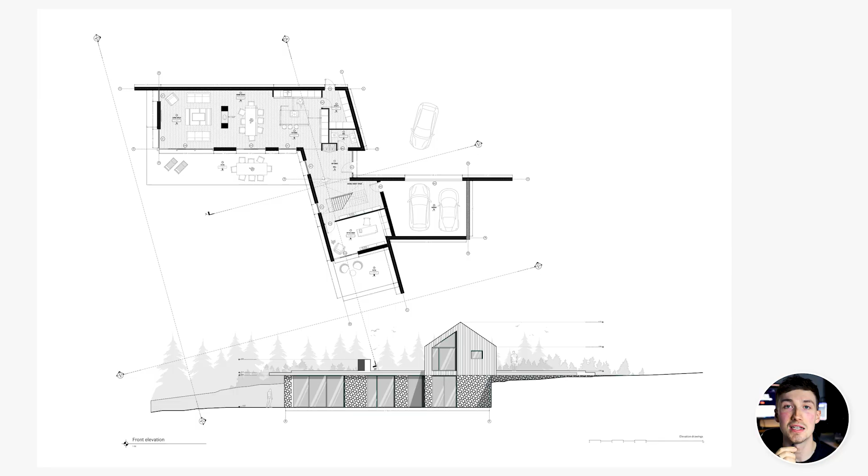By changing color, texture and hatch styles, line weights and layers, you can really start bringing your drawings to life, turning a black and white drawing into something powerful and captivating. Stylizing your drawings makes them more memorable and consistent when putting them together in a document. This is where Rayon becomes really powerful with its graphic capabilities, letting you edit and stylize drawings to communicate them the way you want. In this lesson, I'll demonstrate how you can turn this black and white drawing into 3 different styled drawings.

For the purposes of this lesson, I've put together a composite drawing of the ground floor plan and front elevation. The reason I've done this is because it makes it easier to talk through how to style your drawing and coordinate between the two views, showing you how to implement the styles in both elevation and floor plan. A composite drawing is really powerful in my opinion—it's a great way of showing different levels of information that relate to one another on one page, so we've combined them in this instance.

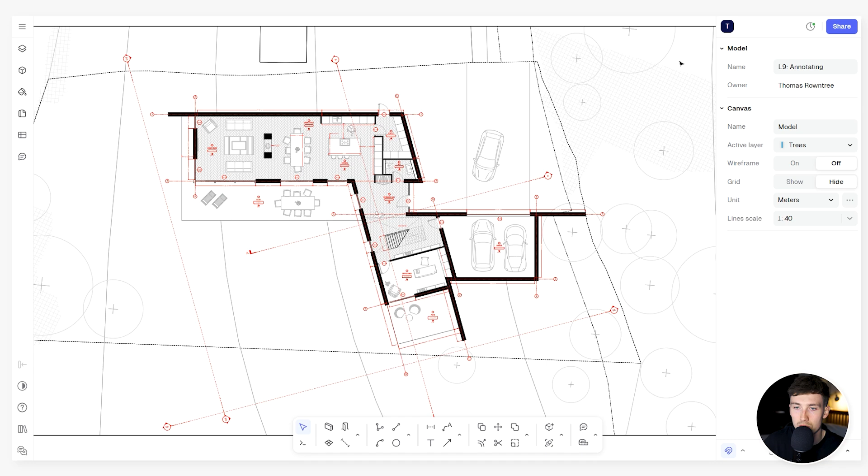The way I've combined this is fairly straightforward. All you have to do is head over to your model, highlight the components you want to copy across, right click, click copy as export—this is really important when copying across models. Come back over to your model, right click, and then paste. That's how you copy items across.

Defining and building a graphic style that's represented throughout your drawings is really important. Graphic styles help encapsulate the viewer, visually enhance your drawings, and provide consistency throughout. So for example, we have a floor plan, a section, an elevation, site plans—if there's consistency in the graphic style throughout, you can clearly see there's a narrative, a coordination between them, and you can associate these drawings together, which is really important when trying to sell your ideas.

I like high contrasting drawings with lots of detail, lots of layering, lots of annotations, and as you can see, the implementation of a graphic style really helps define and communicate a narrative of the project and the story behind the drawings. The 3 graphic styles I'll show in this lesson will demonstrate how you can tell drastically different stories just through the use of color and line weights.

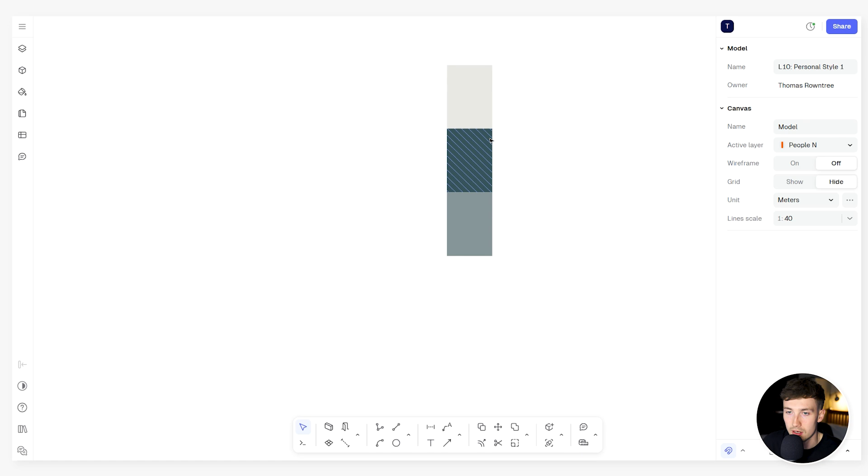We're going to demonstrate that by showing you all of the Rayon styling tools to bring your drawings to life. The first style I'm going to create from this black and white base is going to be a blue style. Over on this right hand side here, I've already defined a kind of color palette.

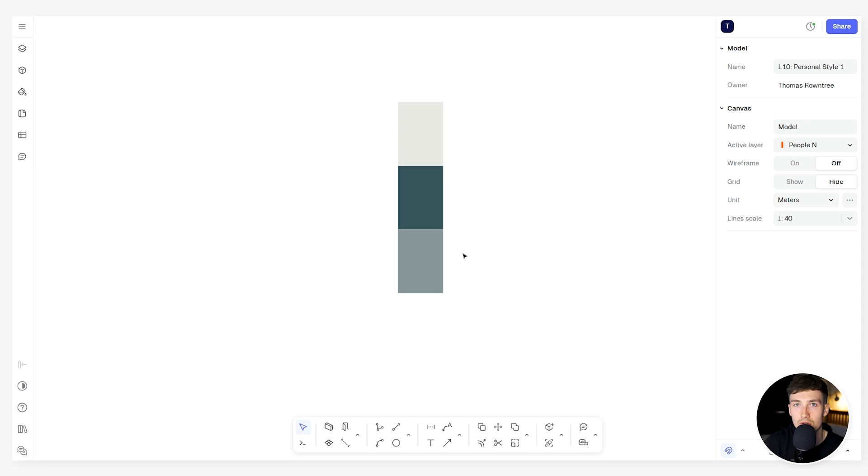Defining a color palette is really important when creating any set of drawings because it helps define a level of consistency throughout—there's a level of coordination. By showing these 3 shades of blue, there's a style and a kind of layering and hierarchy to the drawing that can be implemented. So these are the 3 colors I'm going to work with for this blue style, and there's going to be a hierarchy and layering that we're going to play with.

Although I've touched on many of these components already in this course, I'm going to quickly do a reminder. There are 4 different types of styles: a text style, an annotation style, a shape style, and a wall style.

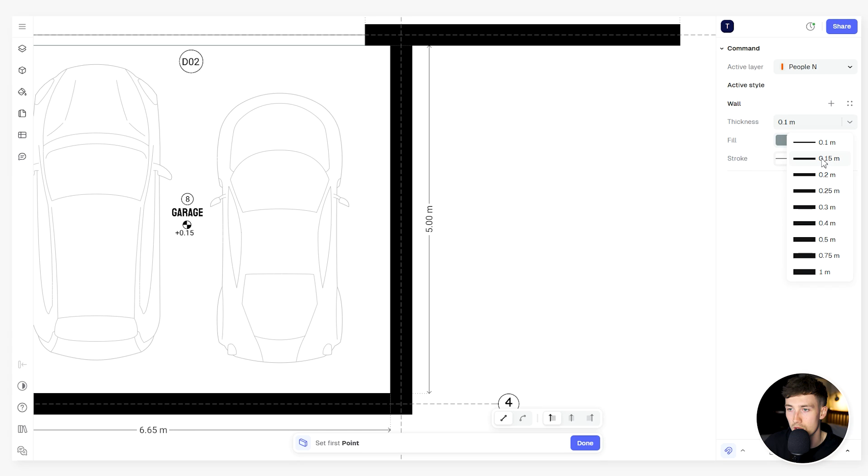So for example, if we start with a wall style, when you select your wall or start drawing a wall, you'll instantly have a kind of default style activated on that wall. You can change the wall thickness, the wall fill, and you have the option of choosing a solid fill, which could be black for example, and you can change the opacity. You can also use the color picker, which is really handy.

For example, once you've defined a color scheme, you can select the color, and then you can have the option of saving that style. So we could call that 'blue wall'.

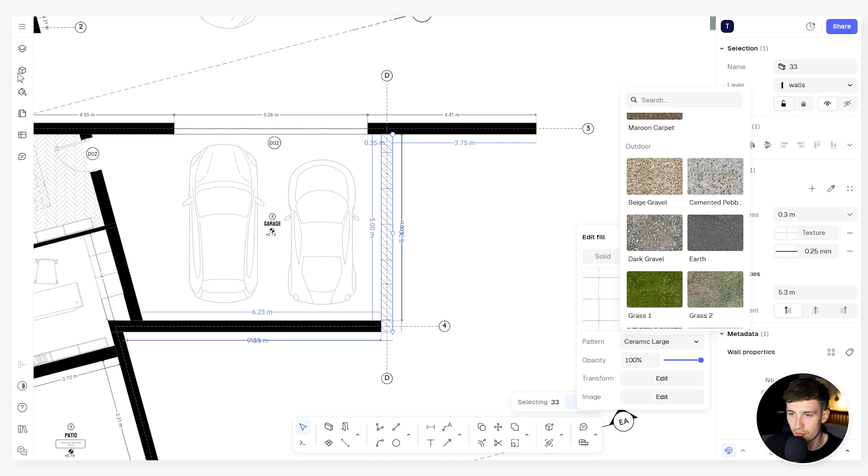You have the option of choosing a texture using the default library, or heading over to the left and using Rayon's texture library, which you can choose from many different textures, which you can transform by scaling up and down. You can change the rotation, and then finally you can use a hatch, which you can also select. You can change the opacity, change the stroke, once again scale it up and down, rotate it, offset it.

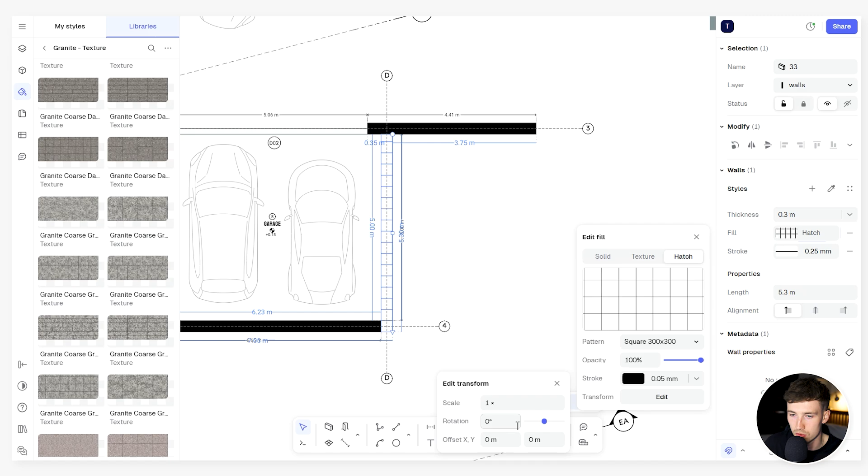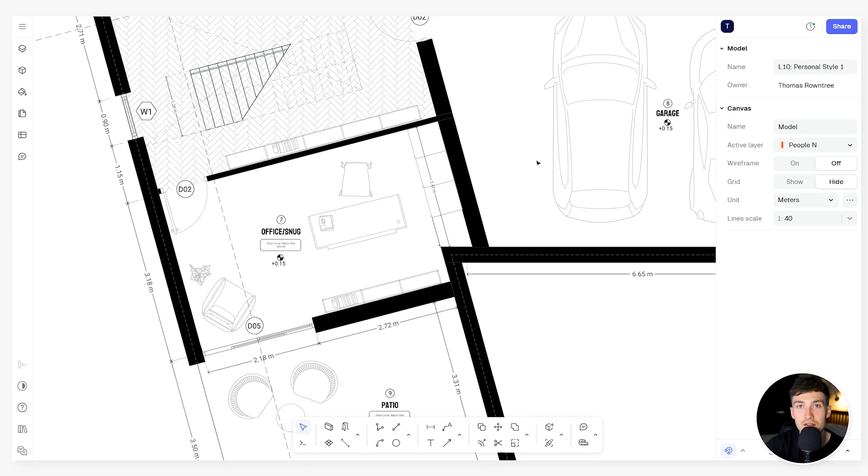Additionally, with annotations, once again you can change the color, text, arrowhead, etc., as demonstrated in the previous lesson. Likewise with text, you can change the font size, and finally with shapes, you can once again change the fill or hatch. In addition to saving a style to an element, you can also detach a style from an element.

So for example, when we select this wall here, you can come to the right hand side and click detach, where you can then make this wall its own style. And a really useful tool to point out also is if you select an element and you click pick style, you can also select the item and it will match its style.

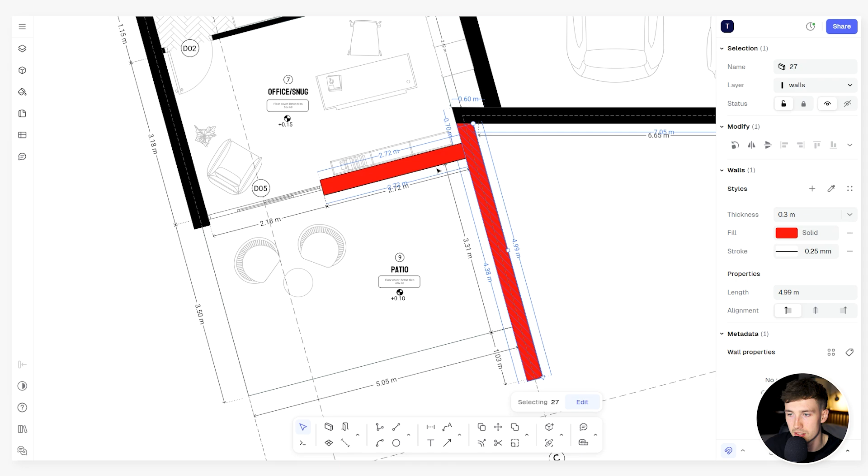And if you head over to the left hand side and select the styles tab, you can see that I have all of these shape styles, wall styles, text styles, and annotation styles saved on the left hand side. These saved styles become really useful when you want to change multiple items that have that style assigned to them.

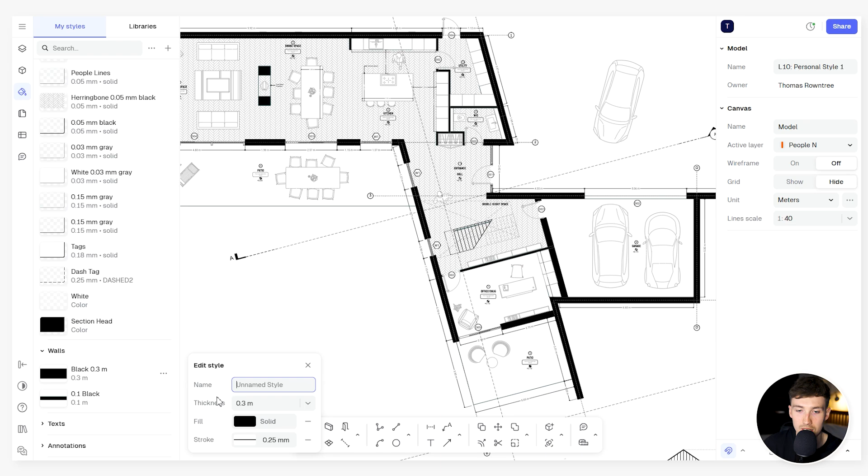For example, if we change this wall style, we can click the three dots, select edit. We could change that wall now to red, and all of those walls that have that style assigned to it will also change. Now I hope that gives you a good summary of styles in Rayon.

And now we're going to start implementing this blue style. So the first thing I'm going to do is head over to the left hand side. I'm going to create a new layer, and I'm just going to give it a background, and I'm going to ensure that that is dropped to the back of the drawing.

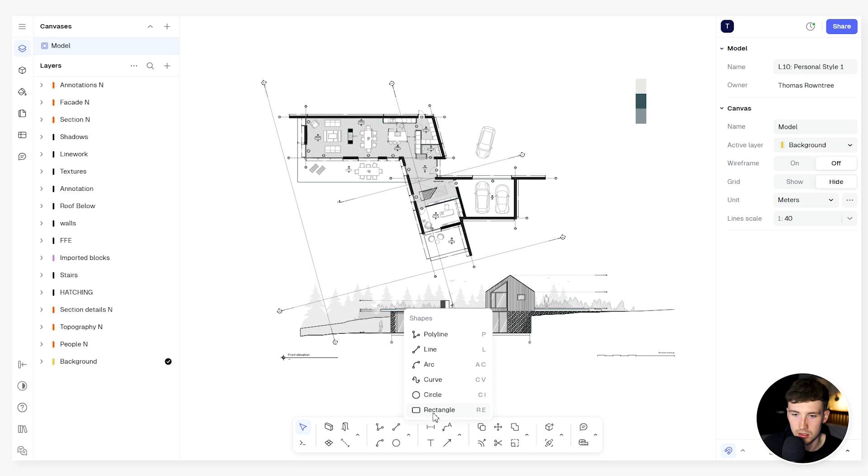And I'm going to draw a background using this light color here, and we're simply going to draw a rectangle, which is going to be our backdrop for the drawing. This gives us a nice backdrop, which we can then right click and lock into place. So that layer is now locked.

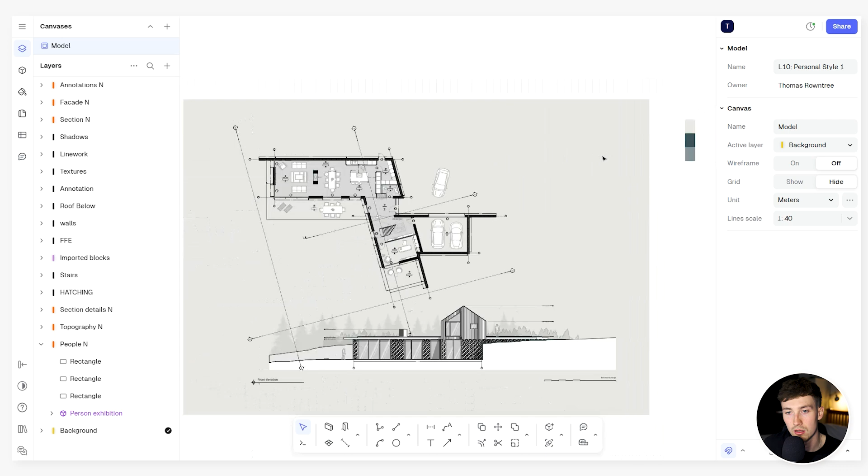So we can now start working into these walls and assigning these colors. Now the walls are going to be this heavy blue color. To give that hierarchy, we want the walls to have that structure and to indicate that weight and thickness in the drawings.

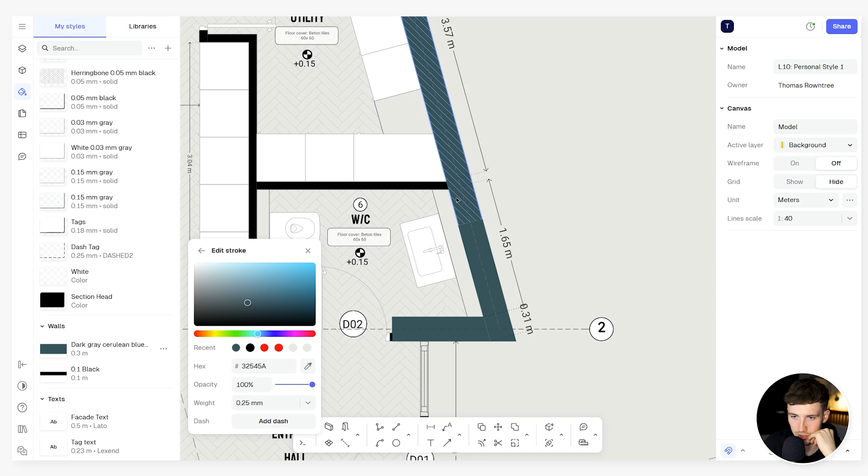So I'm going to come over to the left hand side, select the wall, and change that to this dark blue color. We're also going to change the stroke to the same color too, so we've got a nice consistent wall wrapping round. And for this item here, if we want to assign that style to it, you'd come over, click the quadrant button, and select the dark blue item.

And we're going to do the same with the internal walls. We're also going to make those the same color.

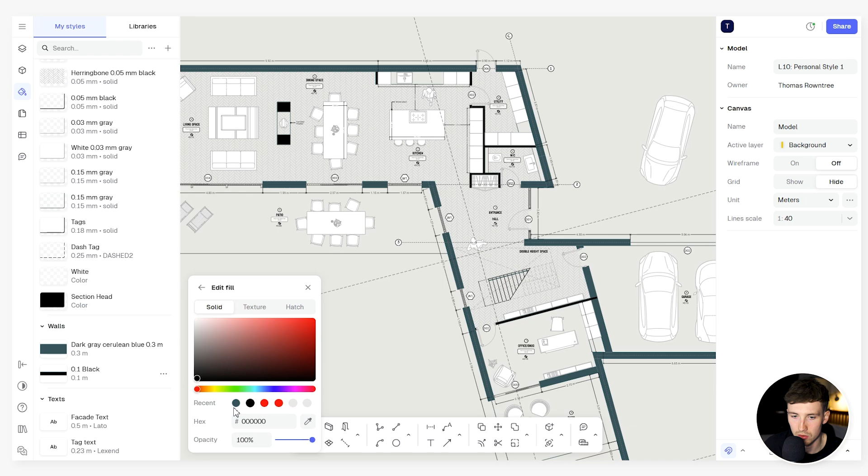Now currently the furniture is quite prominent in the drawings with their white background. So I'm going to select the block and change the style by just removing the fill, which makes them a little bit more subtle in the drawing and not so prominent.

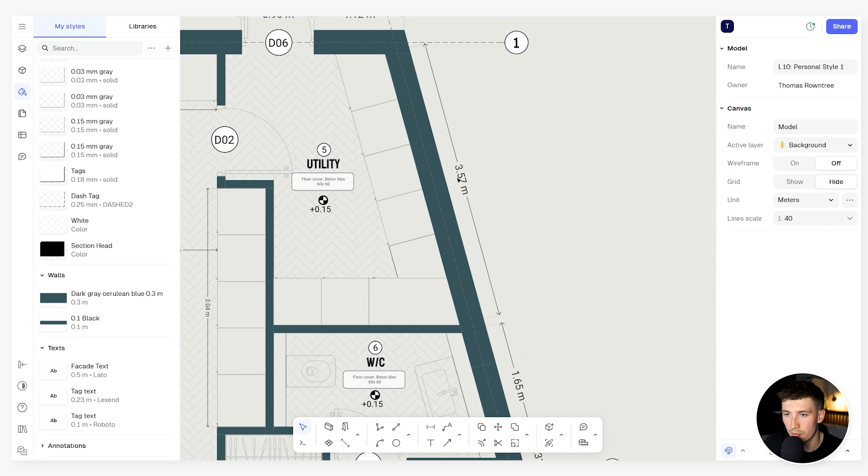A really good little hack for you guys is being able to select multiple items that don't have a style currently assigned to them. You can right click on an item and select similar, so you can either do same style, layer, type, or block. We're going to do same type, so we select all the annotations. Then you can come over to the right hand side, change that style now to that same blue, and all of those items of that type will then change.

And then we're also going to save that style to dimensions, so on the left hand side here in the annotations style toolbar, it will appear. We're also going to edit that style just to make it a bit more subtle, so we're going to drop the opacity down to 50%.

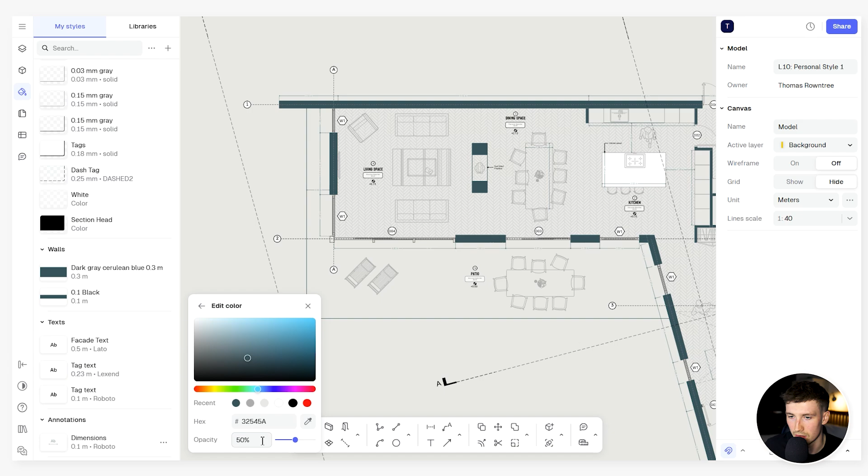Now this is going to be a process of changing all of the styles to the same blue, and I'm just going to do this as we go along to change all of the styles. And then the same with all of the text annotations, selecting all of the text, changing all of those to blue, and then shifting the attention slightly to the elevation. You can do the same with the hatches.

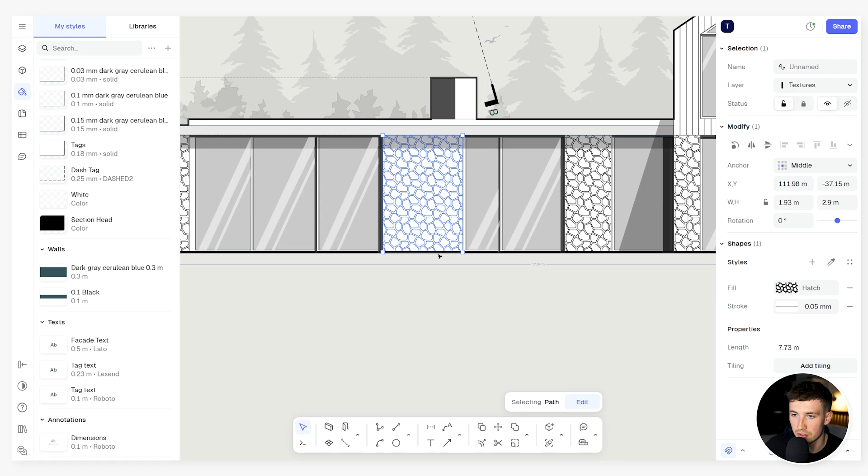These are currently a little bit too heavy, so we're going to change those hatches to the same blue, and drop the opacity down to 50% just to make them a bit softer. We can also save that style, so we're going to save that as stone hatch. Then we can select multiple items and change that by clicking the quadrant button.

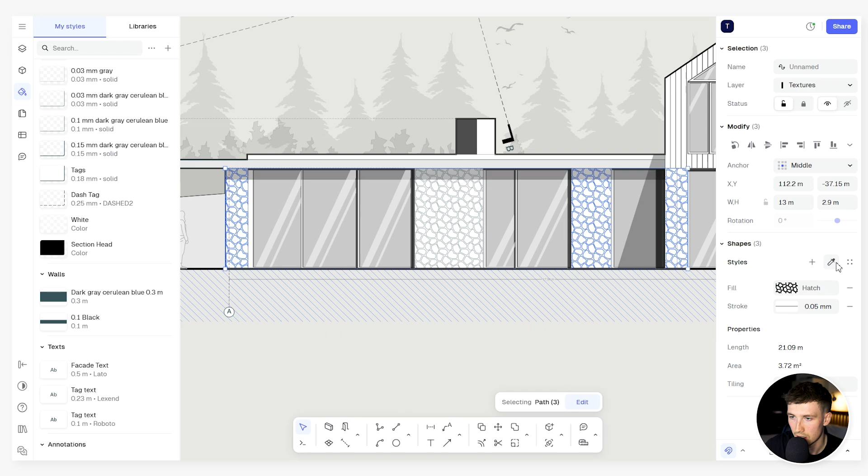And the same in the background here, we've added some trees which we've imported. We're going to change those to blue, so everything is going to be the same blue color. As you can see here, this is where the layering and the opacity works really well, where you have two items overlapping one another. You get that nice layered look in the drawing, and it gives the drawing a bit of depth.

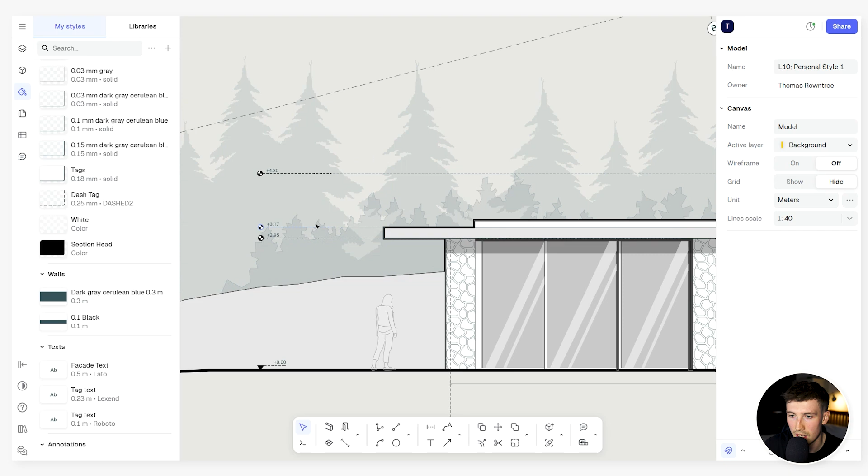A really useful tool to make note of is that you can also change the tiling of your hatch. If you head down to the right hand corner here, you can change the rotation, you can change the offset, but you can also click into the hatch and change it so that it is independent to any style. So even if you have a style assigned to it, you can rotate it, you can move it, and it won't change throughout.

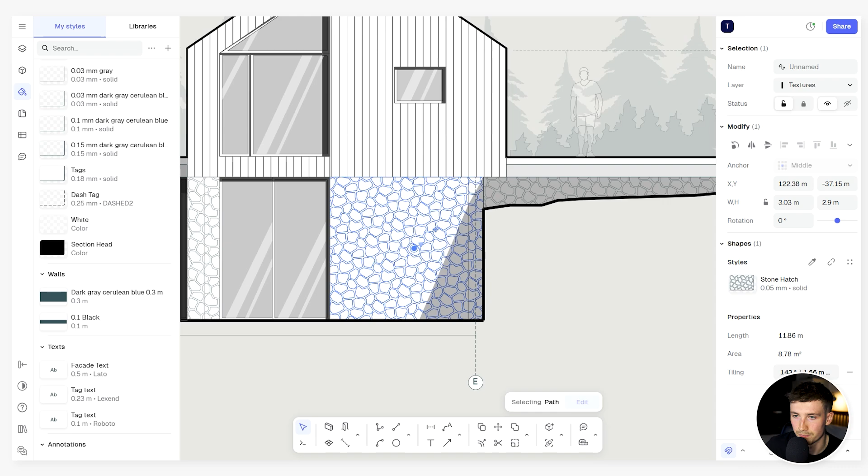Now, with a bit of work, you'll arrive at something like this, where pretty much everything has been assigned. With the blue, we now have a bit of a hierarchy, with some of the items dropping further into the background with the opacity. We now have quite a soft drawing using these pastel blues. It's a little bit softer than the harsh black and white with the red tone, but I think it's a really nice subtle touch. The colours work really well, and it has that nice and soft feel to the drawing.

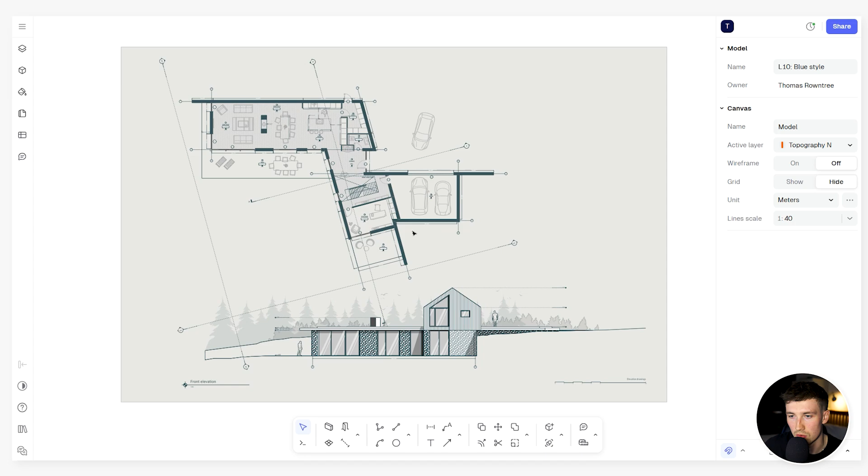So this is style number 1. Now the next style is going to be this rendered slash textured style. This is a really useful way of showing a realistic representation of your drawings, adding actual textures to indicate floor finishes, to indicate a realistic environment, in a carpet for example, the tiling throughout the kitchen, living and dining space. We've got some concrete floor for the garage, the patio area.

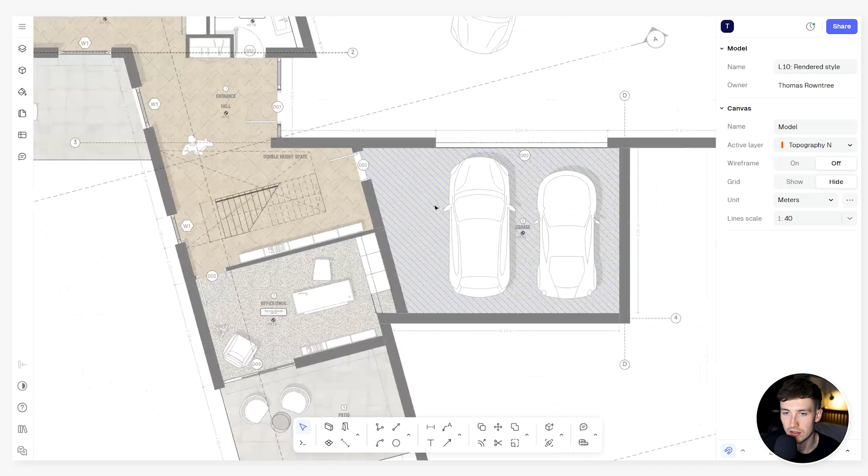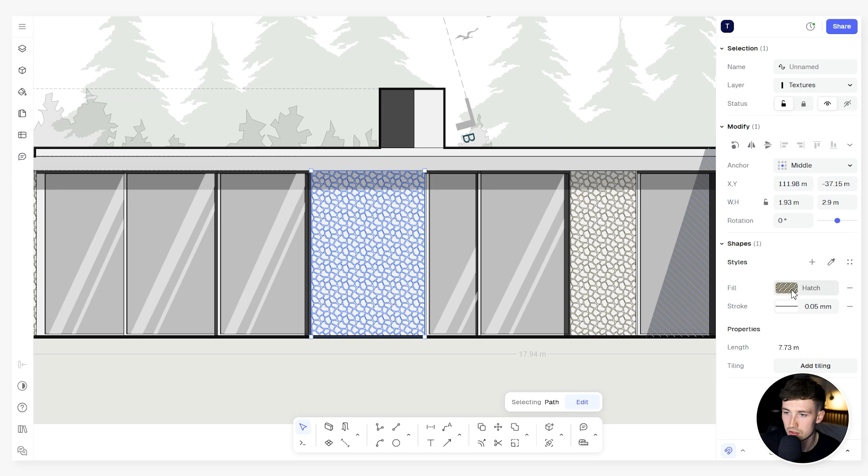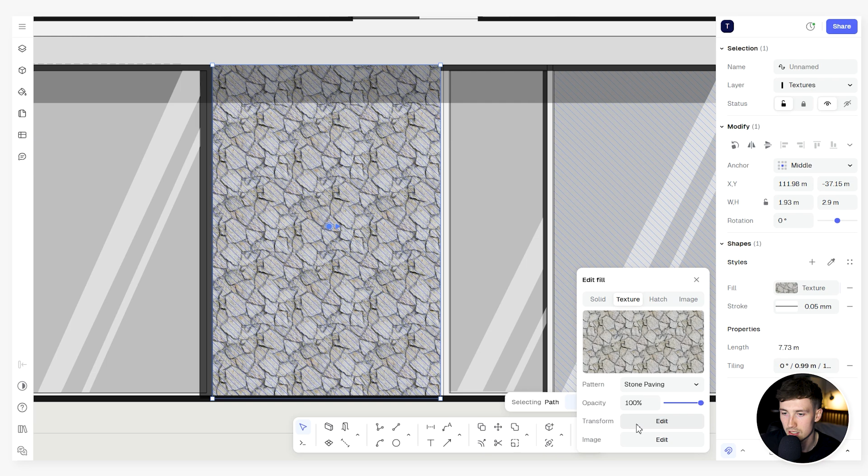For example, we could even go into textures on this right hand side, and we could change this to a kind of stone paving, which would be extremely realistic. You can then change the position of this tiling by activating the tiling at the bottom right corner. You can then scale this texture up and down, once again as previously shown. So we've got some really big pieces of stone.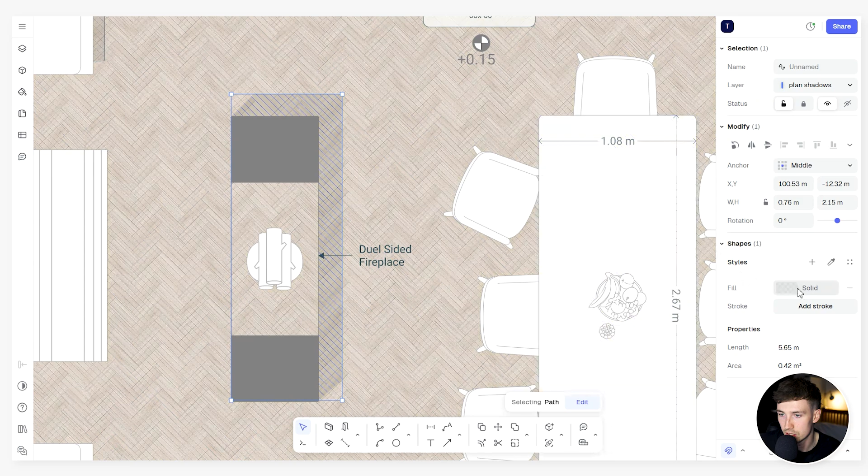But in principle, this is another example of how you can begin to use Rayon's hatches and textures to indicate a realistic environment. And in this drawing, we've also added some shadow, which is simply drawn by using the polyline, drawing around the items as indicated in the interiors model, interiors lesson. And then we can change to a 10% shadow just to make the drawings have a bit of depth.

And the final style is this inverted style, which is my personal favorite. Once again, going through the process of changing these styles on the left hand side, making everything white with a blue background locked in the background, and the drawings pop. It gives it that kind of blueprint drawing effect.

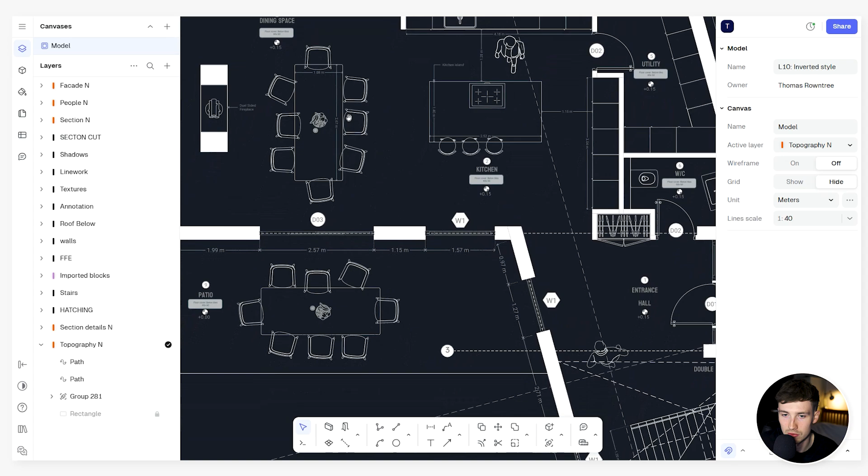It gives the drawings a quality, a line quality that I think is really powerful and makes them pop. It's quite intriguing, and you want to read more into the drawings, and it shows a level of detail that might not necessarily be shown on a realistic style, for example.

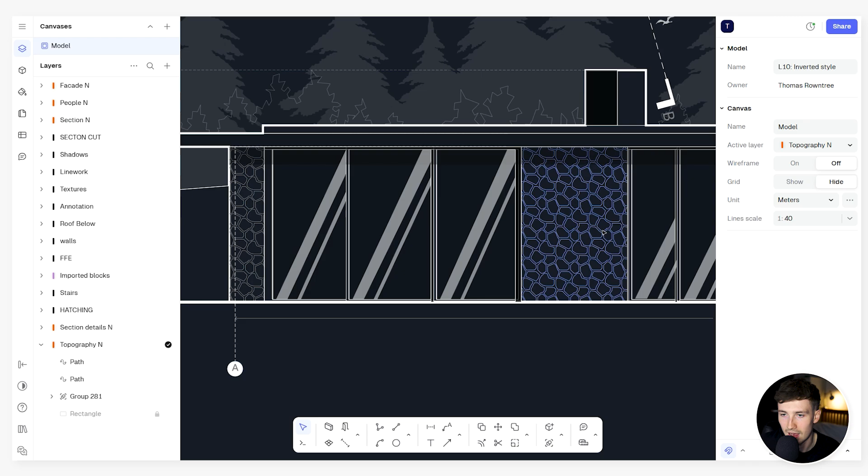And likewise in elevation, you get a really nice strong graphic, for example, with these reflections in the windows. The hatches really begin to pop. You get a nice layered look in the background with the white annotations. And I just think an inverted drawing just looks really powerful, and it's my personal favorite.

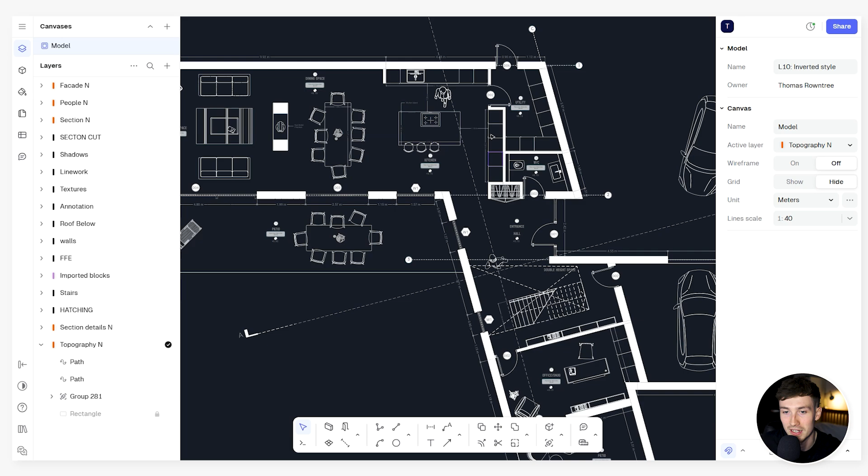I tend to do inverted drawings a lot, and it's a really great way of just adding a level of detail to your drawings without really doing much, just by simply changing it with a black background or a dark blue in this instance. It makes your drawings really pop and have that level of detail and intrigue.

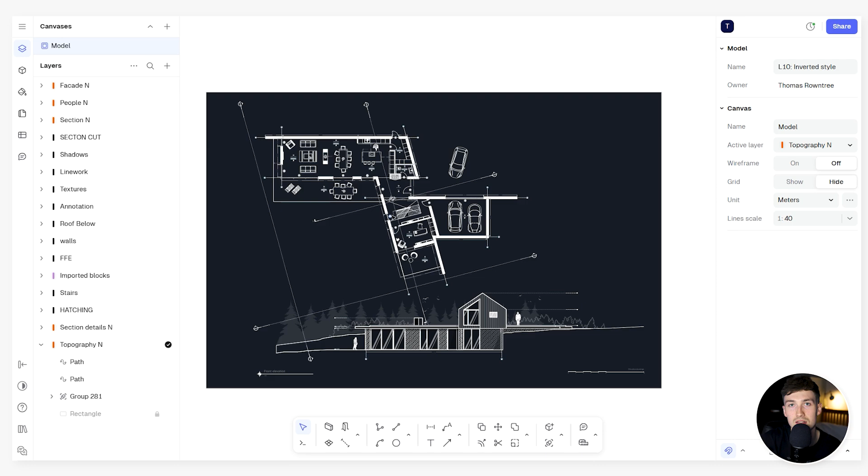And those are the 3 graphic styles that I wanted to indicate in this lesson. As you can see, there is a vast range of options with hatches, with textures, with fill colors, and the capabilities of Rayon with their styling tools is really powerful to start implementing your own graphic style and building a narrative around your drawings.